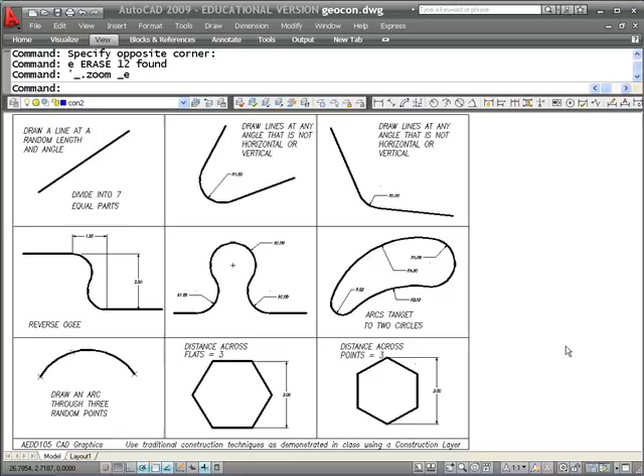This is the seventh in a series of short videos on how to complete the geometric construction assignment for AEDD105. What we're going to do now is to draw an arc that goes through any three random points. To begin with, I've changed the format for points now. So if you go to the Format pull-down, Point Style, I've used a point style with that little X.

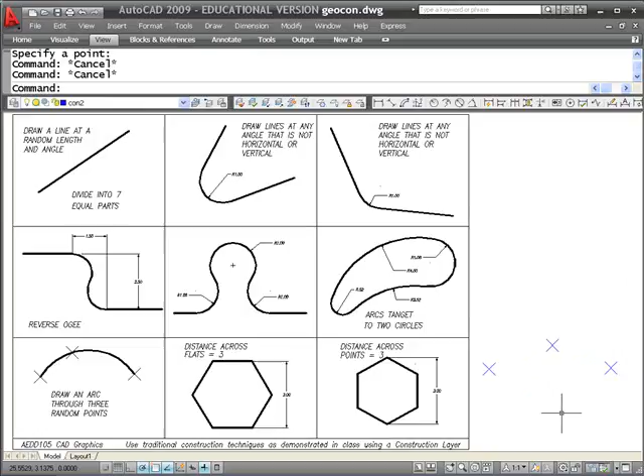I'm just going to randomly place 3 points. Put one here, and one here. What I want to do is to draw a circle or an arc that starts here, goes through that one, and goes to there. Now, AutoCAD has several options that will allow you to do that. The arc command itself can be drawn through 3 points. But what we're going to do is use construction techniques once again, and here's what that would look like.

We're going to take advantage of the fact that geometrically, if you have a circle, the chord of that circle has a particular property, which is that a line drawn at the midpoint of that chord that goes through the center of the circle is perpendicular to the chord. If you draw a line from the center that's perpendicular to the midpoint of a chord, it's going to be perpendicular. It's going to be at the midpoint. So what we'll do is this.

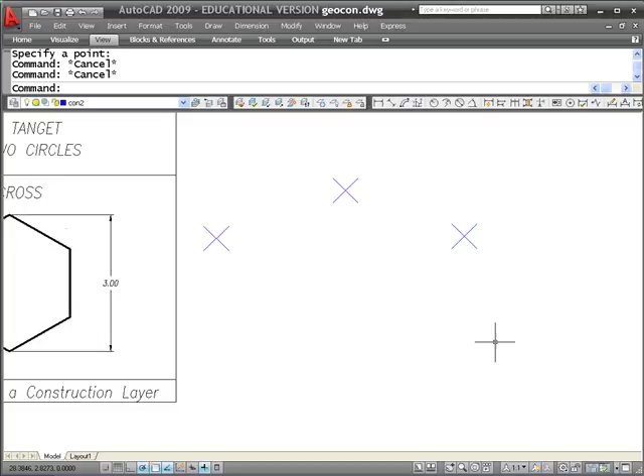I'm going to draw a line, and the first line is going to go from that point right there. Now I have an object snap called node that allows me to snap to a point. So I'm drawing lines that go from point to point, like so. Those now become the chords of two circles. Now what I'm going to do is to draw a line that goes through the midpoint of each of those chords and is perpendicular to them.

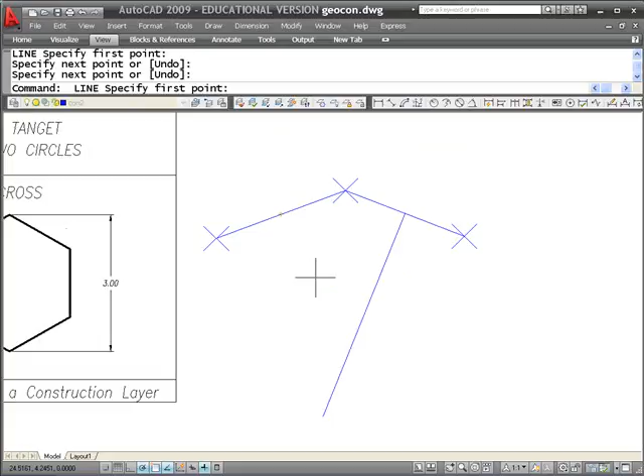I have set as one of my running object snaps both perpendicular and midpoint. So now if I draw a line, I acquire the midpoint and come off like so, I can now draw a line that is perpendicular to the midpoint of that one. Do the same thing over here. Okay, perpendicular. I'm just going to go down to here. Goes like that. What does that give me?

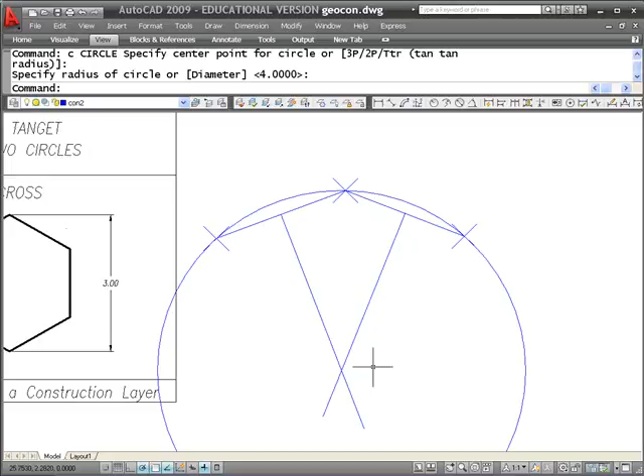That gives me a circle whose center is right there that goes right through all 3 points. Has to, because those two lines create a chord, and if the perpendicular bisector of the chord has the center on it, draw 2 of them and where they cross has to be the center of the circle. Now I can take that, place it on the object layer, use those 2 lines right there as my trim lines, clean that back, and now what I have is a circle drawn through 3 points.